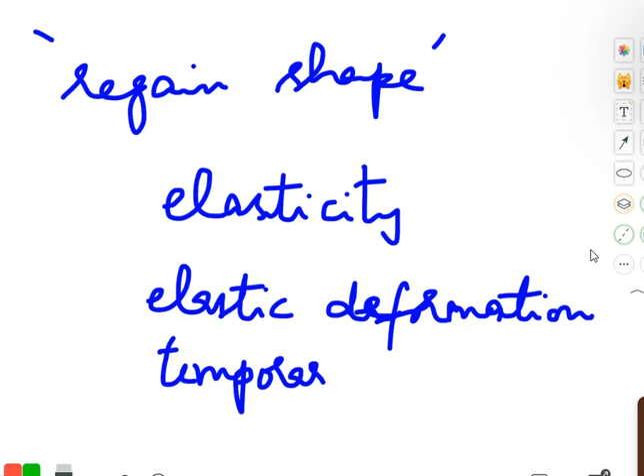Whereas there is a permanent deformation also possible, in case of plastics. Those substances are called plastics, and the property is called plasticity. Plasticity is the property.

If you take mud and putty, these are all examples of near ideal plastic. Permanently, we can deform something. You cannot get back its original shape.

So when we see this elasticity, why is it important? It is important because it plays a great role, a major role, in engineering designs of large structures and things like that. It plays a very important role.

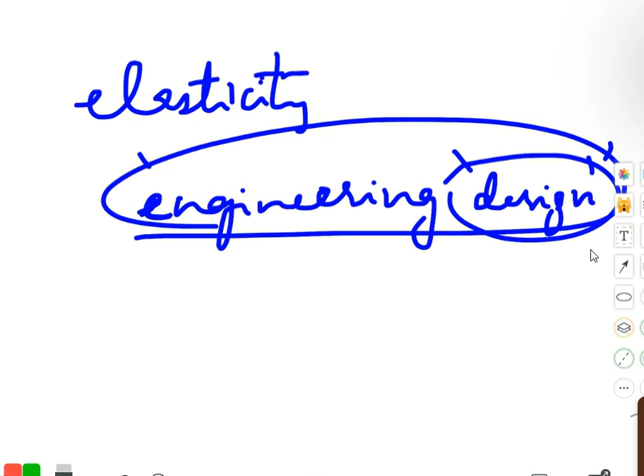Design engineers focus and try to understand more about the elasticity, the nature of especially the buildings that are built with concrete or steel, even aerodynamics. Aeronautical engineers also try to study the properties of materials, how to make an aircraft lighter. At the same time, it has to be strong.

So what should be done? And what kind of force will act on them? If some forces act on these bodies, or the buildings, or the aircraft, how will it get deformed? How does it affect the structure of the building? Understanding this makes it important for your design aspect in engineering.

To begin with, we are going to see something called stress and strain. What are they?

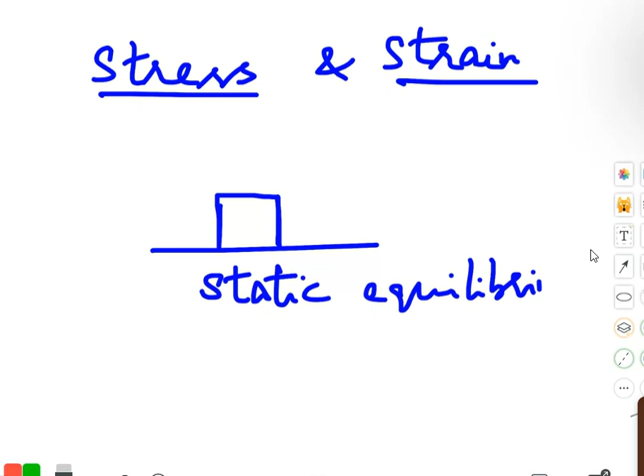Let's suppose you have a body, an object which is in static equilibrium. And I'm applying some force on it, on this body. So depending upon the nature of the material that is here, if it is a concrete structure, iron, or something...

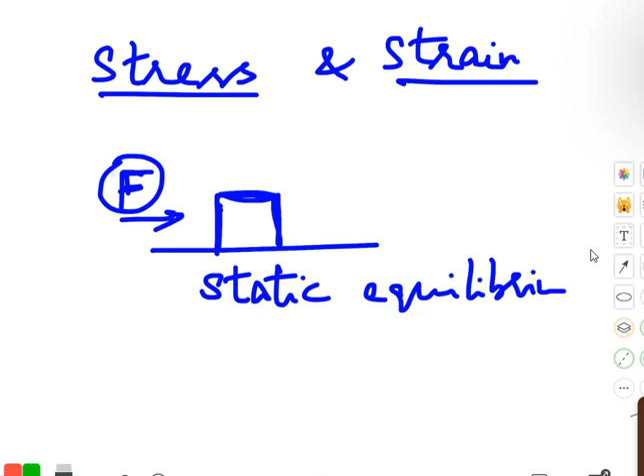The force is not going to deform it necessarily. The amount of force, depending upon the nature of the substance, and the amount of force, the deformation will change. You apply a huge force on some soft material, it is going to get deformed much. So the deformation which is caused due to the force applied on the object depends on the nature of the material. Depending upon the nature of the material, the deformation will vary as well.

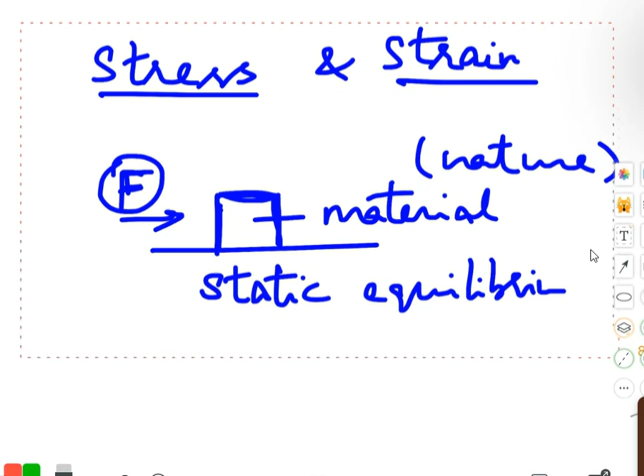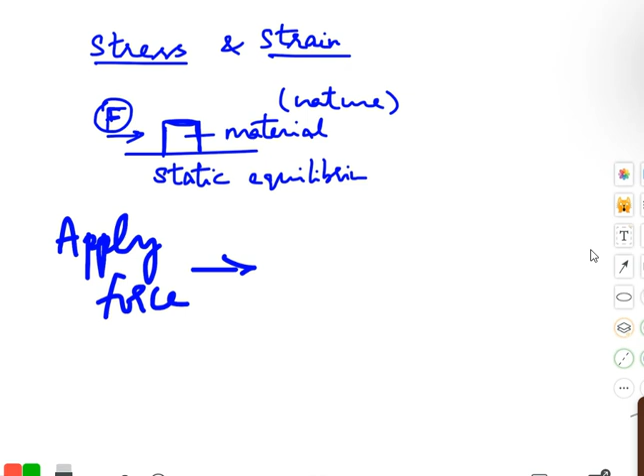Now you're applying the force. A force is being applied. What happens to the object? Let's suppose it is going to get deformed. This is your object. Now this force that you're applying can be called deforming force.

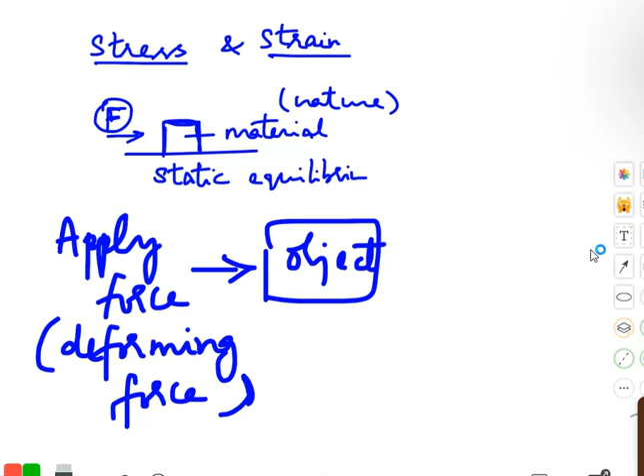Can you give me an example of deforming force? Punching clay, punching clay objects. Could you brief it a little more on that? What happens? So when you punch, for example, a clay toy or a clay car, it creates an impression which shows the presence of a deforming force. Or a car hitting into a post. Pulling a rubber band.

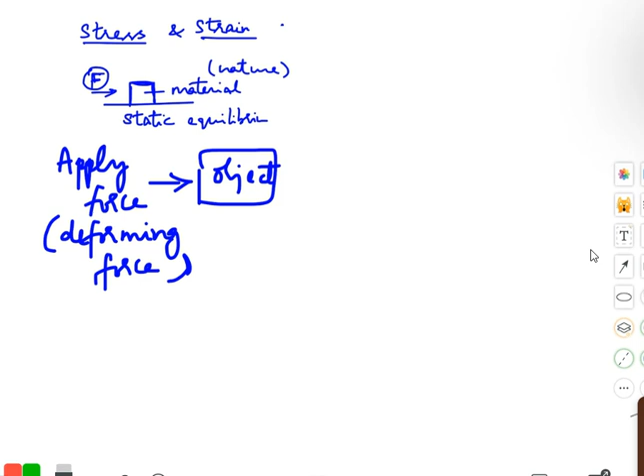So all these are examples where the force applied is going to deform the object. So the force which, when applied on an object, is going to deform it, can be called a deforming force. When there is a deforming force acting on it, there will also be another force acting, called a restoring force, which will try to restore the body to its original form.

So for every deforming force, there is going to be a restoring force acting on an object. So what is the role of the restoring force? Bring it back to its original shape. Sir, so for example, if you're taking the clay impression...

The deforming force is much greater than the restoring force. That's why it doesn't return to its original shape. Not only that, it also depends upon the nature of the material.

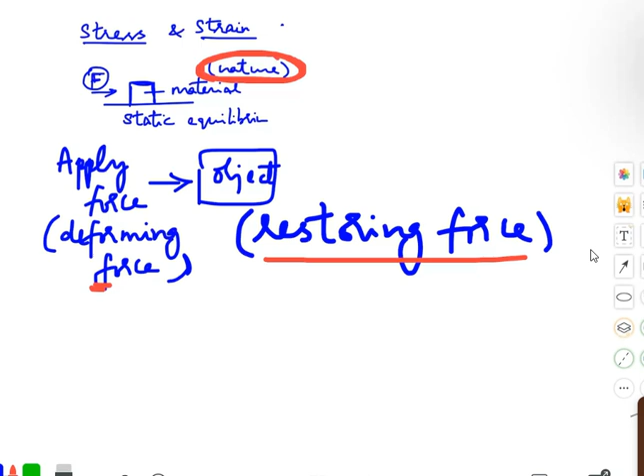So now, if there is a deforming force, we see that there is going to be a restoring force, right? Now they are going to be in opposite directions. So if one acts in this direction, the other one is going to act opposite to that. The directions are going to be opposite to one another.

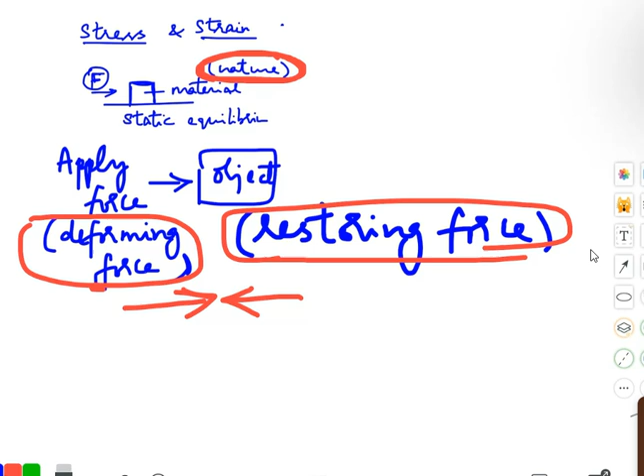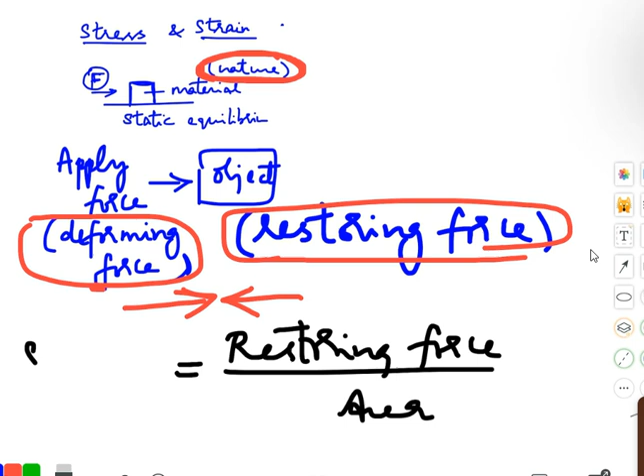One tries to deform, the other tries to restore. So now, the restoring force acting on the body for a unit area—whatever total area is there, if you divide the total force by the total area—we call this ratio stress. This is what is called stress in terms of physics. So how do you measure it? This is your force by area, the amount of force which is going to act on an object.

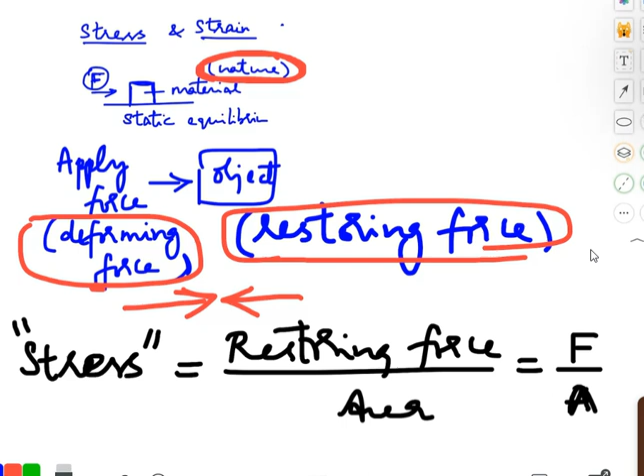The restoring force is going to be equal in magnitude. So... Yes, sir. So here, isn't that just pressure? Hmm. Isn't it just pressure? It is pressure. So it's another form of pressure. Force by area is nothing but pressure also. Correct. Now, if you look at it, imagine this force acting as a normal to the cross-sectional area.

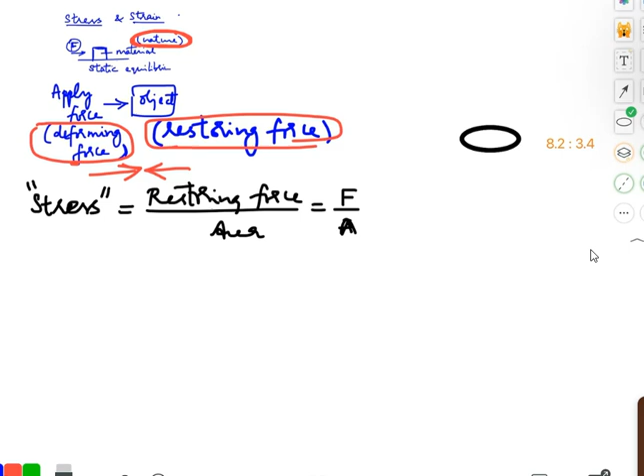So, what do I mean by it? Let's take the case of a cylinder. Imagine I have a cylinder. Any cylinder that you can think of, a water tank, cans, Coke cans, small. I think you don't use such. You guys use them, energy drink or some juices, refreshment. Yes, juice, sir. Cans. So you crush.

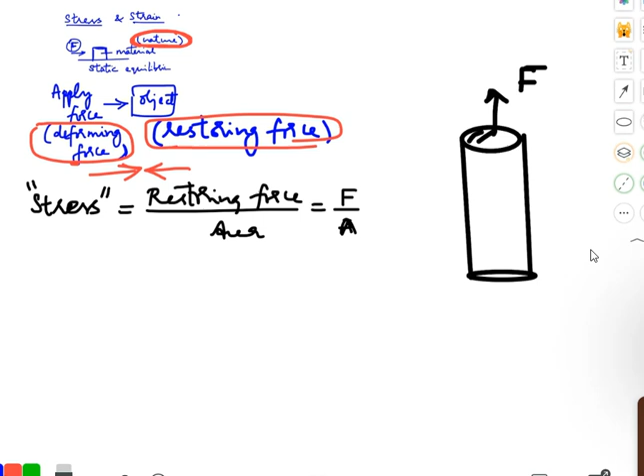Let's say you're applying some force. You're applying a force which is normal to the cross-sectional area. Cross-sectional area is the circular part, right? The force is applied normal to the cross-sectional area, where A is the area of the cross-section. So the stress is F by A. So what is the unit now going to be? Pascal. Newton per meter square, or Pascal. Yes.

Okay. So what will be the dimensional formula? Newton is what? Force is mass into acceleration, so M L T minus 2. Area is L squared. So you have M L minus 1 T minus 2 as the dimensional formula. Is this clear? Yes, sir. Hope this is clear as well. All right. Next step.

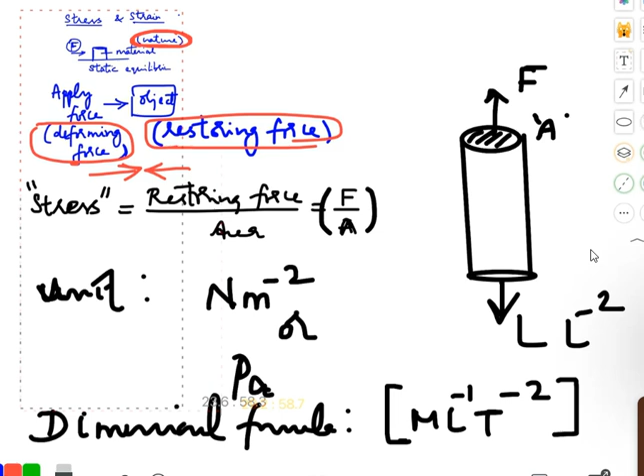So by the application of force, a solid can be changed in respect to its dimensions. You can apply the force at an angle, or perpendicular, normal. If you apply the force externally, pulling it from both the sides, what will happen to that can? Both sides. It will just jump a bit and then break off. So you're applying a force in this manner on both the sides. What will happen to this? It's going to rip apart. Elongate. You're pulling from both the sides.

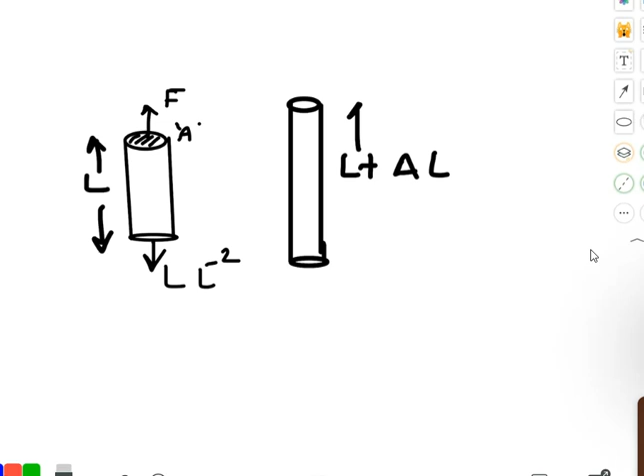So suppose its original length is L. Now L plus delta L will be the new length after the application of the force acting outwards on both the sides. Okay. Similarly, not only this, we can also think of applying the force sideways.

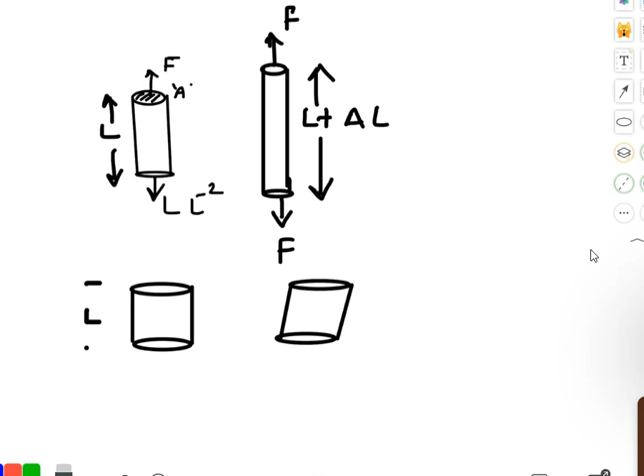So if you apply a force in such a way that it gets tilted, you're crushing it. Can this happen? Have you seen shapes being changed like this? No? Yes, sir. We might have on some occasion. A stack of papers, for example. Yeah, totally. Okay.

So here, the force is being applied around the edges. When the forces are acting in this direction, that is when the deformation takes place like this. You can see the shape is moved by an angle. Deformation is by some angle.

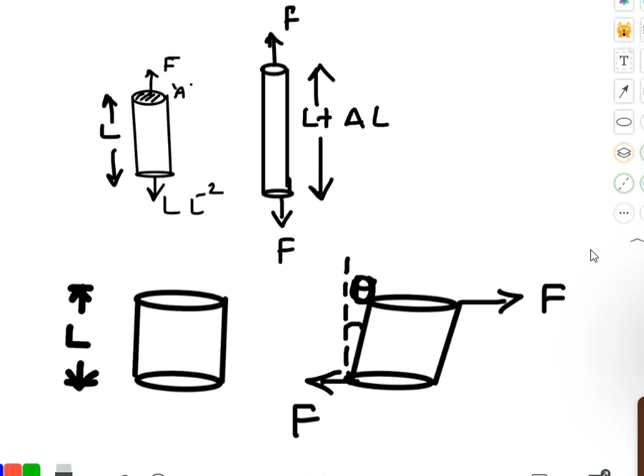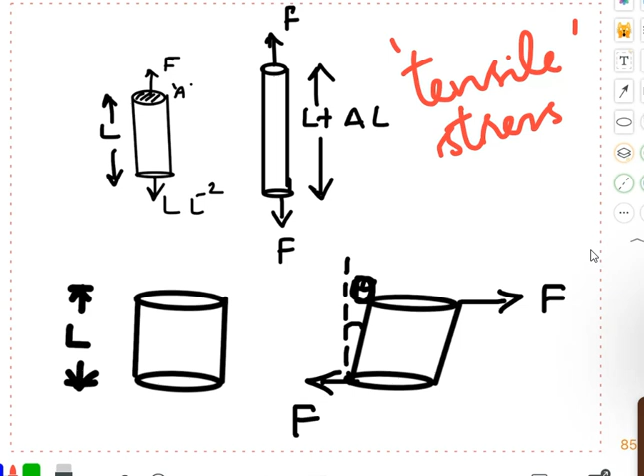So in the first case, the stress acting on the cylindrical body is called tensile stress. What is it called? The stress on this cylindrical body. What is the stress otherwise also called? Tensile stress. What was the definition we said? The ratio of what to what? Anybody? Anyone? Force and area. No.

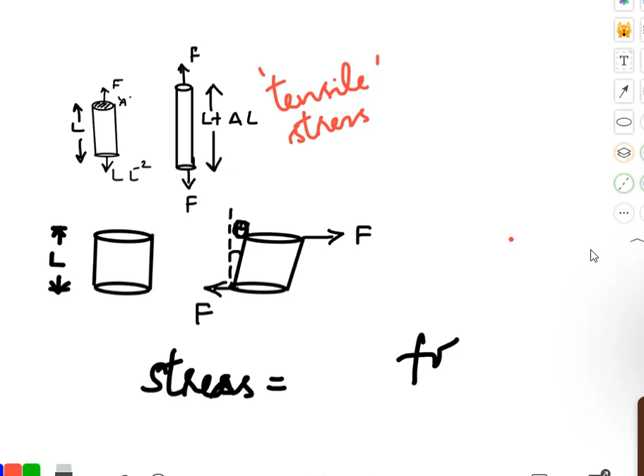Anybody? Nobody? Stress was the ratio of force and area, right? That's what was told. What was it? Restoring force. It's okay. Not just force to area. Force to area is nothing but the pressure. Restoring force to the area is what your stress actually means, and this is your tensile stress, what you're seeing in the case of a cylinder when the force is acting normal to the cross-sectional area.

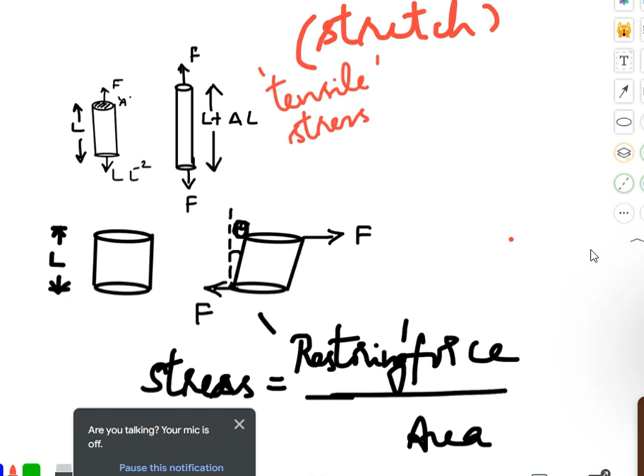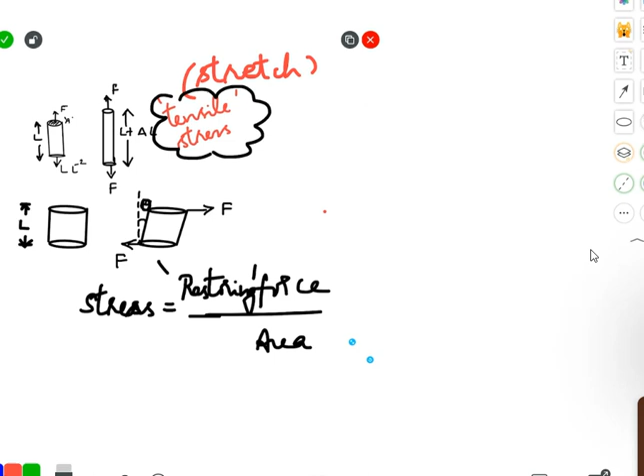On the other hand, here what are we trying to do? We are trying to stretch it. The forces are applied in such a way that the deformation is happening as a stretch. So in this case, you can call it as a tensile stress. Right? When you're crushing it so that it is going to compress, you can call it as a compressive stress.

Okay. During compression, the same stress becomes compressive stress. When you stretch it, it's going to be called tensile stress. Is this part clear? Yes, sir. So what will happen in the tensile stress or compressive stress? Will there be an impact to the length? Yes, sir. There is going to be an impact with the length. In tensile stress, it will be longer, and in compressive stress, it will be shorter.

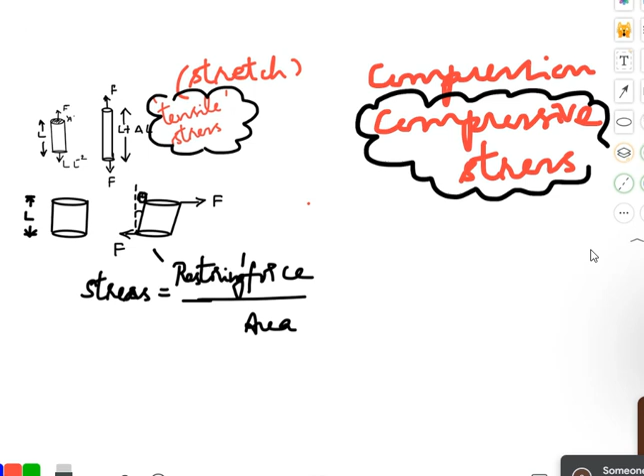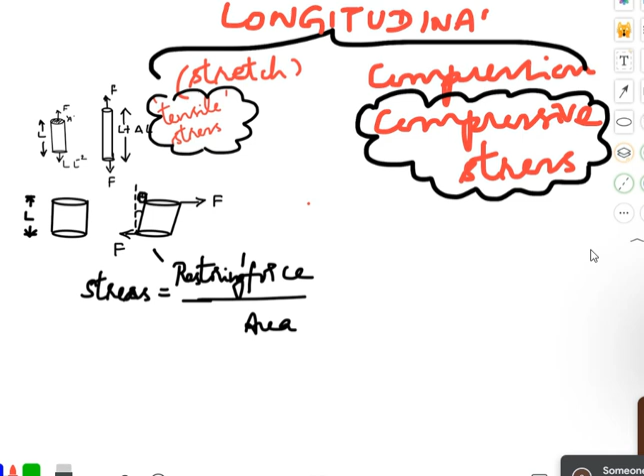Yeah. So since both these stresses are affecting the length, we can also call them as longitudinal stress because it affects the length. Can we accept this or should we oppose this? We can accept it. Yeah. This is called longitudinal.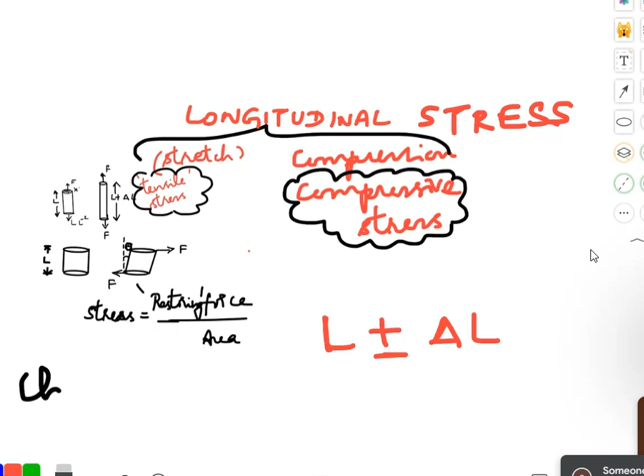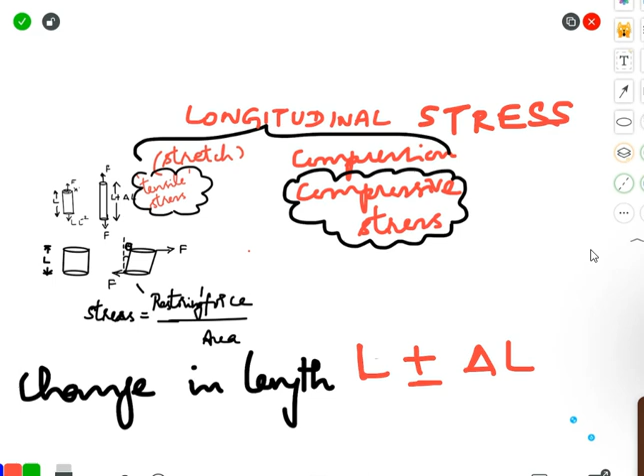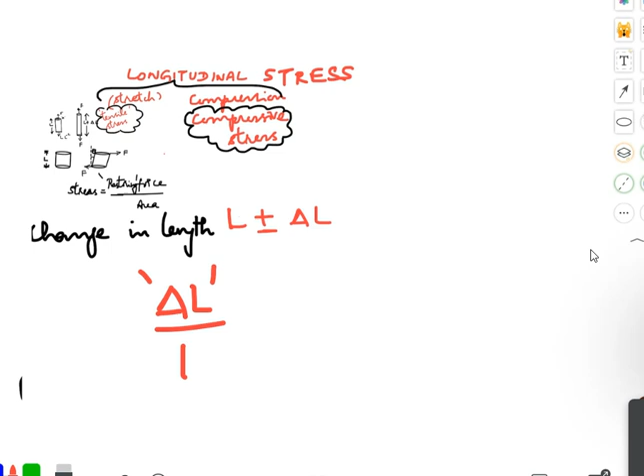So then, the change, so L became L plus delta L or L minus delta L, isn't it? Yes, sir. Change in length was nothing but this. Now if you look at this delta L, what is delta L? Change in length. Difference in length. Yeah. So the change delta L with respect to L, we call it as strain. That is called the strain acting on the body.

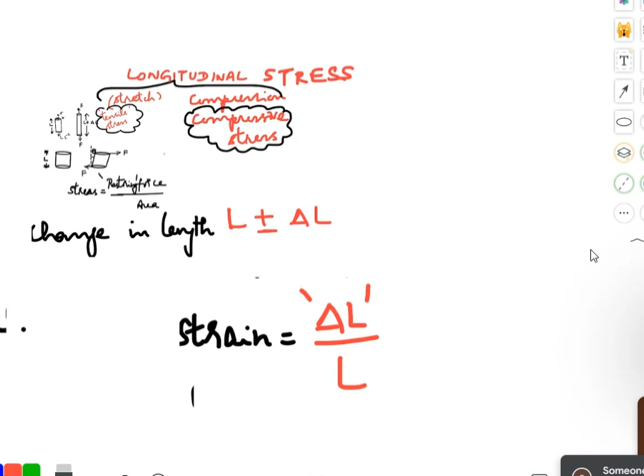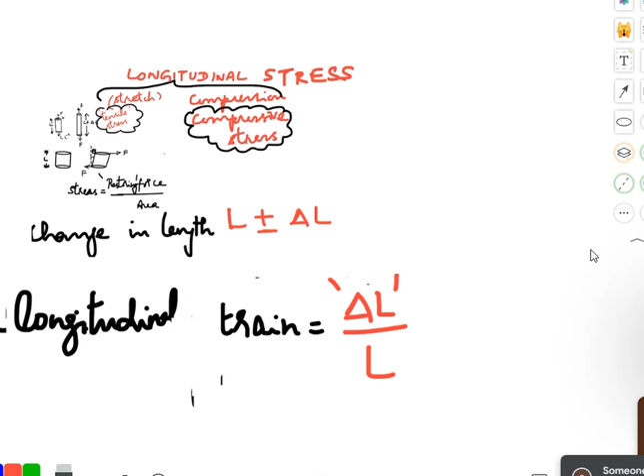Now, since this is with respect to the length, can we call it as longitudinal strain, just like longitudinal stress? Yes, sir. We can call it only if you want, otherwise we'll call it something else. Okay. So one is longitudinal strain, and there is longitudinal stress. And what is longitudinal stress again? It includes compressive stress and tensile stress. And it is a ratio of what and what? Restoring force by area. Absolutely. So we saw what is the longitudinal strain now, right?

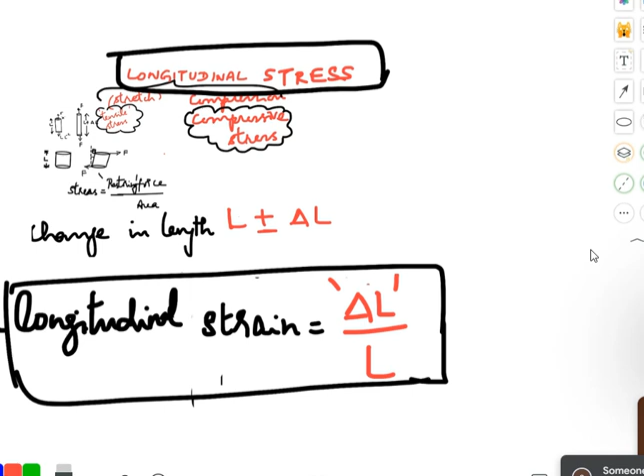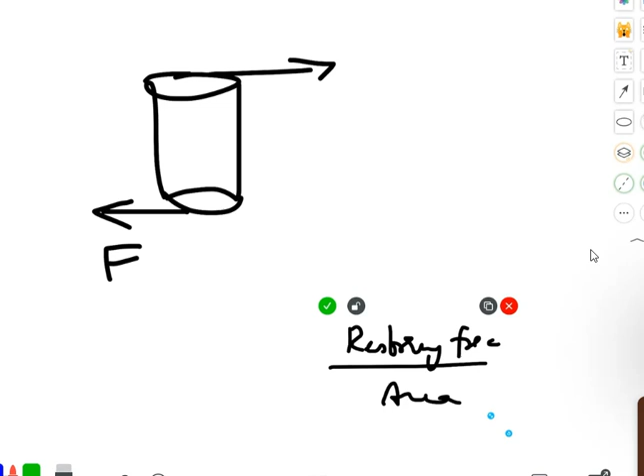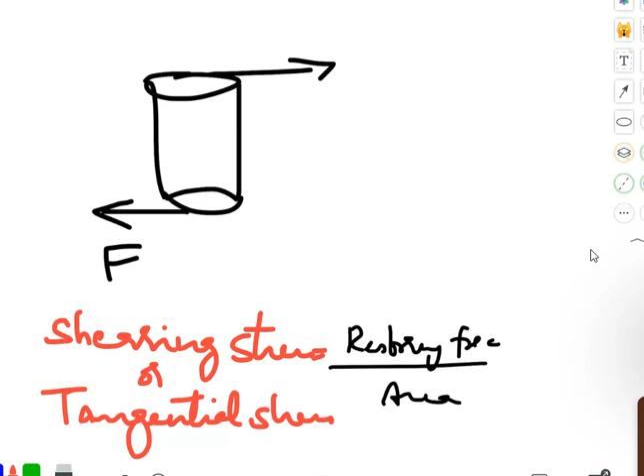So when the force is acting parallel to the cross-sectional area, this restoring force per unit area is going to be called shearing stress. What stress? Shearing stress. Now it is acting along the surface, parallel to the surface as a tangent to it, so it's also called tangential stress. In which case, the body moved like this. Shearing stress. Depending upon how the force is applied, the name is called as this. So restoring force by area.

Is this also compressive stress, uncle? Is it going to be compressed? There is no compression. Where is the compression? There is an angular displacement in place, isn't it? This was the same diagram you showed for compressive stress, right? I had drawn it, but we are discussing it now. Sir, that diagram was not for compressive stress, right? Only for the cylinder when it was acting perpendicular is it compressive stress. Normal. That is also called tensile stress? Yes. Tensile and compressive stress, there are two things.

Anyways, I'm having this recorded, so if you go over that, you will see what is tensile stress and what is compressive stress. When do you call this tensile? When it is elongated. Absolutely. Compressive stress is when it is compressed. Both affect the length, so you call it longitudinal stress or longitudinal strain. Here it is going to be tangential stress, also called shearing stress. So what will the strain be called?

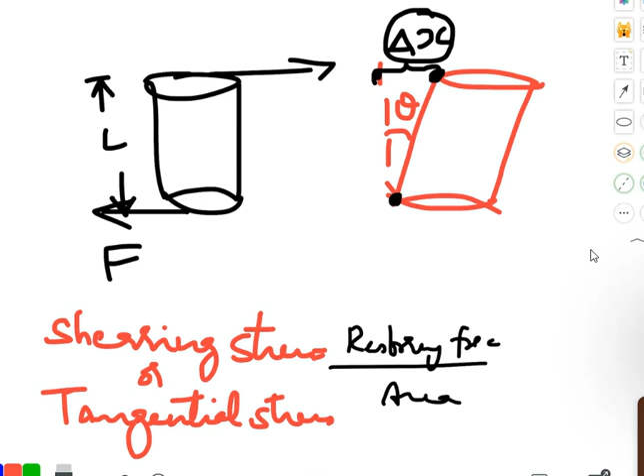So this is creating a strain, the deformation on the cylinder. What is the displacement that is happening here? Sir, are you writing anything on the screen? Not yet, I'm about to. If you look at this region, it has tilted by some angle, and not only the angle, the original shape has moved by some distance, isn't it? Yes, sir. So that change delta x to its original length L, this ratio delta x by L.

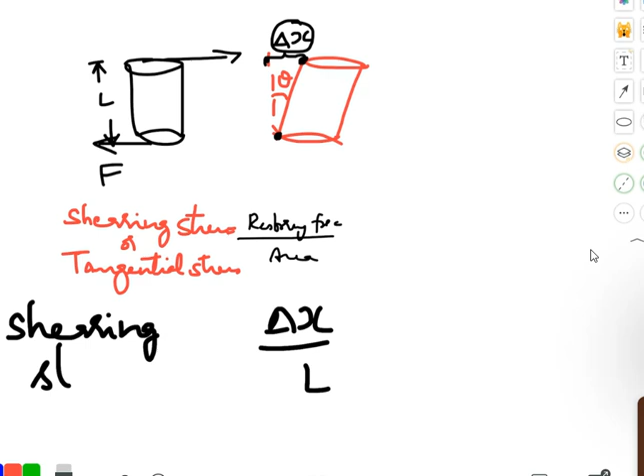So what was the strain in the previous case? How did we find the strain? Delta L by L. So here, delta x by L is going to be called your shearing strain. This much amount of strain it has undergone, the deformation, which is nothing but tan theta.

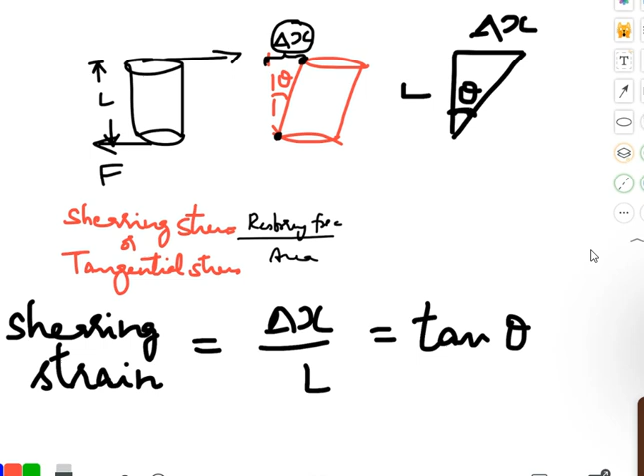If you look at this, this is delta x, this is your L, this is theta, right? Hypotenuse is this, adjacent, opposite. Opposite by adjacent is what? Tan theta, isn't it? Everyone? Yes, sir. That is your shearing strain now. And theta is nothing but the angular displacement. So usually theta is small.

So when you apply the same kind of force over a textbook, like a shearing stress on a textbook, what happens? When theta is very small, tan theta will be approximately equal to theta itself. Tan zero, what is tan zero? Tan zero is 0, isn't it? Yes, sir. Right. So for lesser values of theta, the angular displacement will be very minimal.

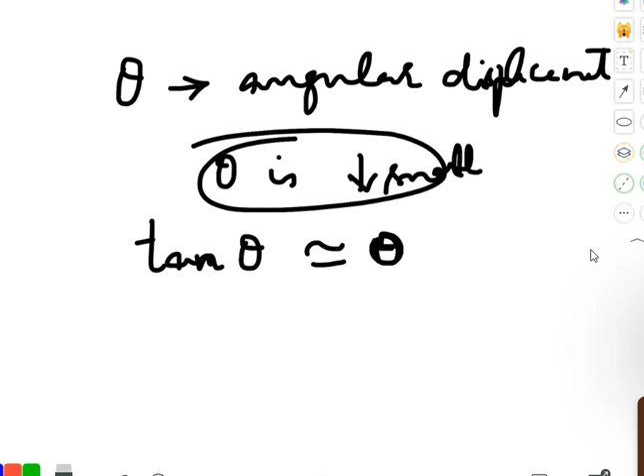But for a solid sphere, you take a sphere, and that sphere is going to undergo pressure from all the sides. Say some solid shape is there which is going to undergo pressure from all the directions. So uniform compression from all the sides. Now the forces are acting inwards. What will happen to this? Its size will shrink, isn't it? Uniformly applied means it is going to decrease the size of this. Okay.

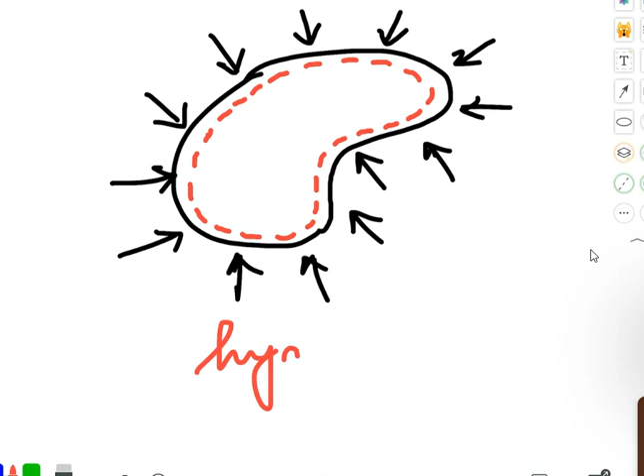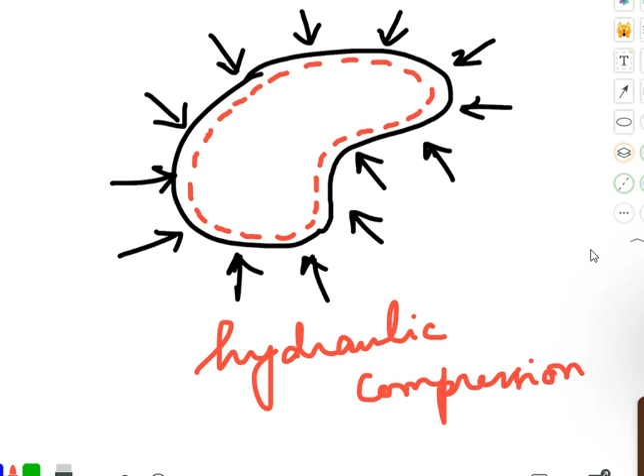If I have a solid sphere and I'm keeping it in a fluid, and that fluid is under high pressure, such as the one that we are seeing, we call it hydraulic compression. So hydraulic compression is: just imagine a solid substance placed in a fluid under high pressure. Can you arrange the words? Get what I'm saying?

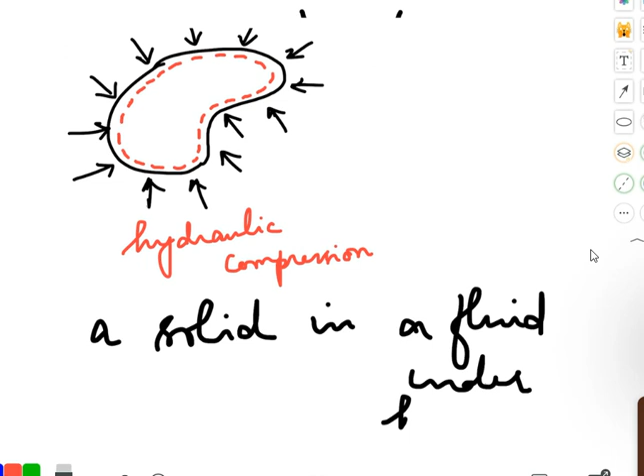A solid in a fluid under high pressure. The fluid is undergoing high pressure, and in that fluid, you are keeping a solid intact. You have a fluid which is under high pressure. In this, you are keeping a solid substance. Understood? Yes, sir. That is referred to as what kind of compression? Hydraulic compression. So in such a case, what is going to happen?

Its volume is going to decrease. In hydraulic compression, its volume will be decreased, but without any change in its shape. So hydraulic compression results in a decrease in the volume, but no change in shape. You should remember all of these things. Okay? So there will be a restoring force in this case also, which we're going to call hydraulic stress.

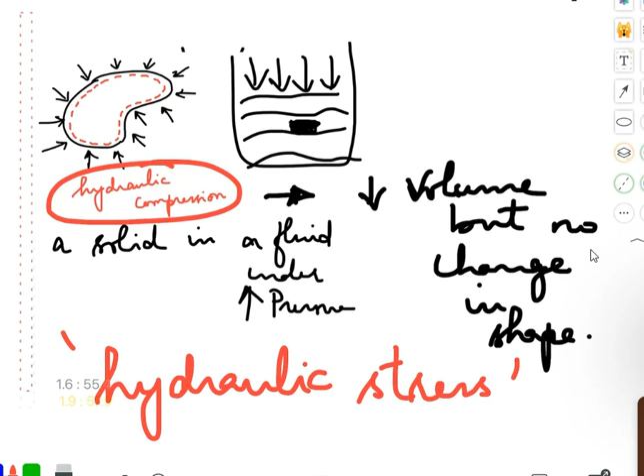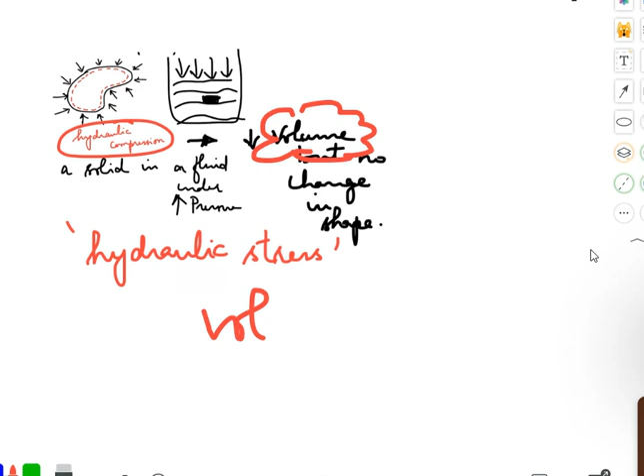So what is this hydraulic stress again? The restoring force per unit area is going to be called hydraulic stress. And in hydraulic compression, what is the change we come across? Volume. Volume change, yes, absolutely. Since it is just the volume which is getting affected, in hydraulic compression the strain associated will be called volume strain, which is the change in the volume with respect to original volume. So what will be the dimensional formula for this?

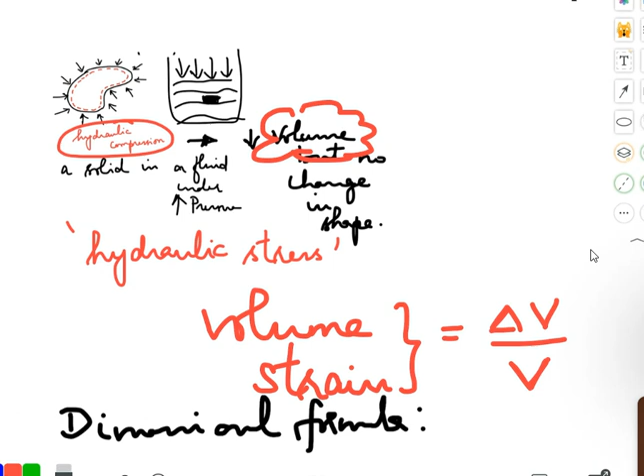Advik? Yes, sir. Can you help me with the dimensional formula and the unit for this one, please? Sriram? Dimensionless. Dimensionless. Yeah, that's what I also thought. The volumes cancel, right? Dimensionless. And the unit of this will be unitless. Just a mere number. It's just a ratio, volume by volume. Okay. Are we good so far? Yes, sir. Good.

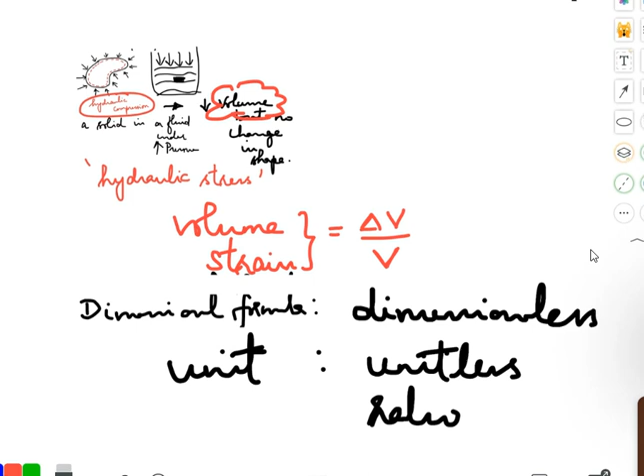Next is Hooke's law. What does this say? For small deformations, wherever the deformation is going to be small, the stress and the strain will be proportional to one another. That's what it says. This is what Hooke's law is. Understood? Which means stress is equal to, if I bring in a proportionality constant, K times strain. So this is applicable for most materials.

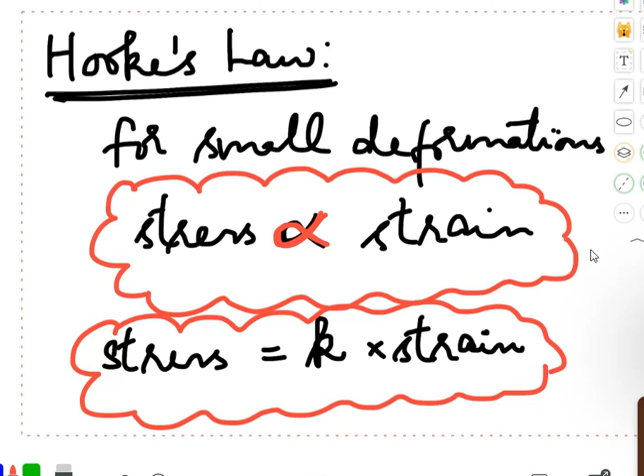Since most materials follow Hooke's law, this law is also known as an empirical law, which is followed by most of the materials. But some materials do not follow this. So K times strain is going to be something like what? Y is equal to Kx. What kind of relationship is this? Quadratic, cubic? Advik, Sriram, Prasan, John,

Sanjita. It's a linear relationship, right? It is a linear relation. No quadratic, no cubic. Linear. But some materials do not exhibit this linear relationship. All right. Next is the stress-strain curve. You're going to see the stress and strain curve.

Let's see what this is. Okay. So the relationship between the stress and the strain on a material for a given tensile stress is what is going to be depicted. We are going to see that in a stress-strain curve. Let's take a look at this.

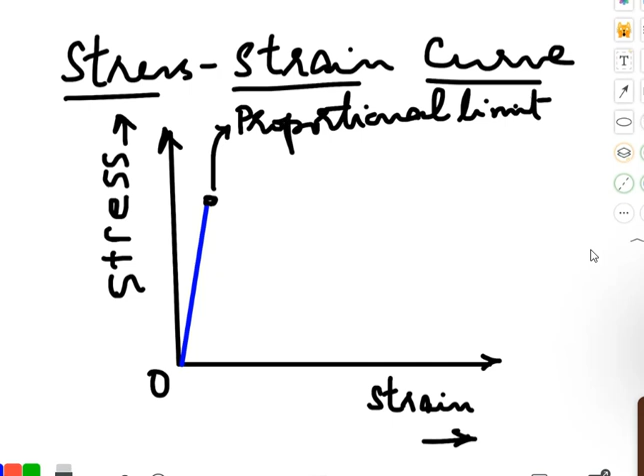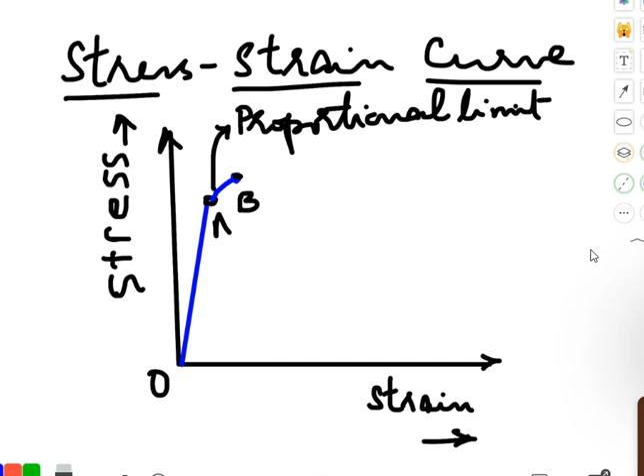Right. Now, after the point A, what happens? If you see, after A there is a deviation from the linearity, and we reach a point which is called point B. This is point A, this is point B, and point B is called the yield point. What point, sir? Yield, Y-I-E-L-D, yield point.

So here, in this region A to B, we are going to segregate these. Up to A, the relationship is linear. A to B, it is not proportional at all. But even though it is not proportional, the body will come back to the original dimension if you remove the force applied on it, or if you remove the load from the body. That point is also called the elastic limit. It's called the elastic limit.

So the stress at this point can be called the yield strength. All right. So now, suppose you are going to apply the load more and more. You're going to increase it. Now the stress keeps on developing. The stress builds up and reaches a point C.

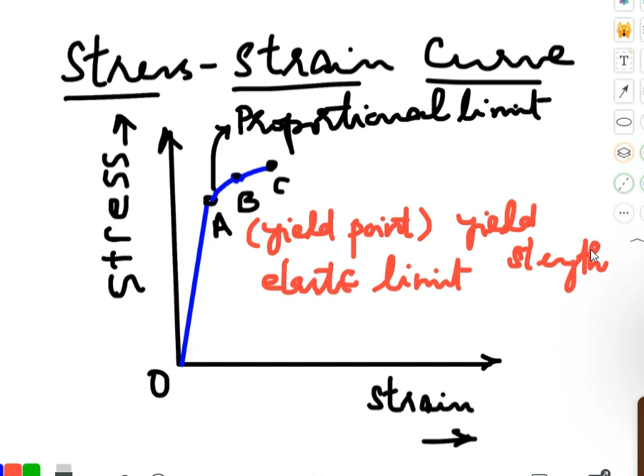At the point C, what happens? C is the point where the stress crosses the yield strength and strain keeps increasing. So after this point, it's going to keep increasing more and more until it reaches a point D. Now, after D, it starts to drop down a bit until it reaches the point E, where it cannot tolerate any further, and it breaks.

So from B to D, if you see, the ability to restore to the original dimension is lost. The body cannot regain its original dimension in this region B to D. Now, the point E. This point is called the fracture point. It's called the fracture point.

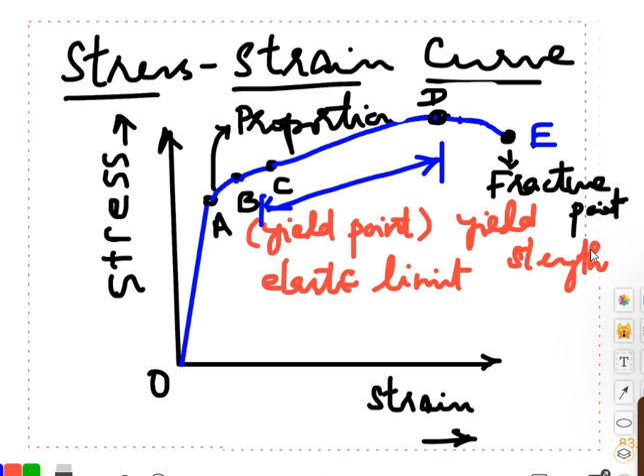If the points D and E are very close to one another, the material is going to be brittle in nature. What is a brittle material? Glass. What happens? They break very easily. So D and E are close.

But if they are far from one another, then it can be stretched, like a ductile material. That is where ductility comes into the picture. If D and E are far away, then the material is going to be ductile in nature. Do you understand this now? Yes, sir. Okay.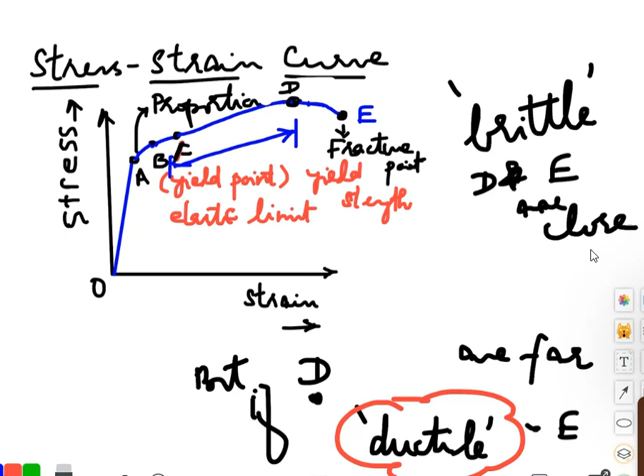So if you see from point C onwards, after B, even if the load is removed at the point C, the material will not have the ability of regaining its shape. So this is the region called permanent set. It is set. I mean, it is gone. It cannot regain its original shape.

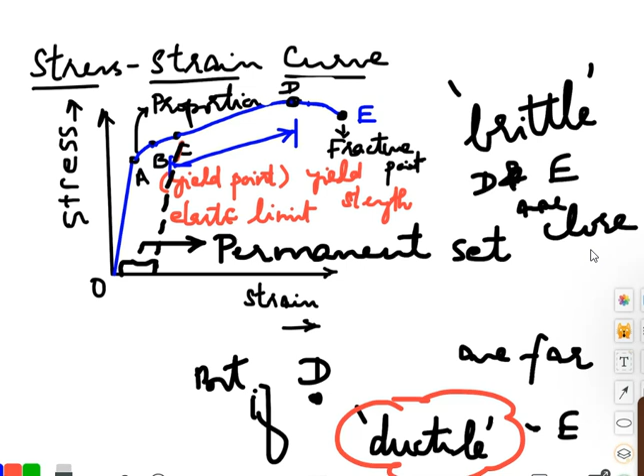So such deformation, the region between B to E, when the material loses its ability to regain its original dimension, we call it permanent set. It is also called plastic deformation. We saw a while back, right? Plastic deformation, what happens in that? Permanent deformation. We saw, no? Yes, sir.

If it is able to regain, what do we call it? Elasticity. What was that? Elastic nature. Temporary deformation. Elasticity. We call it elasticity. All right.

Okay, so we can take a break here and continue the remaining part in our next session. So this chapter is not going to be difficult. It's a very easy chapter if you follow closely. We will have a lot of terms and come across a lot of ratios, and all are going to be very simple.